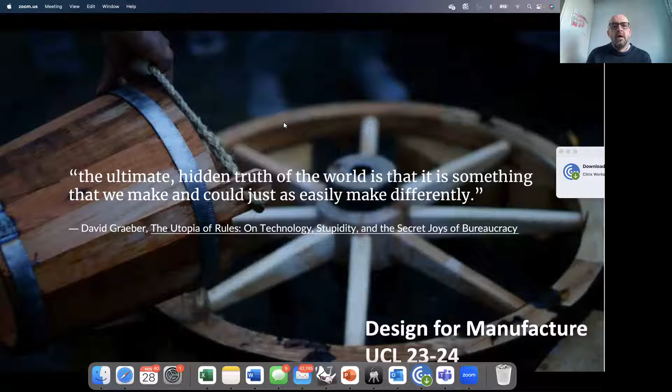So my own research is working with the NHS in the UK to understand how we can use design and manufacturing knowledge from within design to deliver diagnostic centers to eliminate needless blindness. We're working with Moorfields Eye Hospital, and we're also inspired by the Aravind Eye Center in India and how they've used system knowledge to develop eye care for people that can't afford it. So this is to eliminate needless blindness.

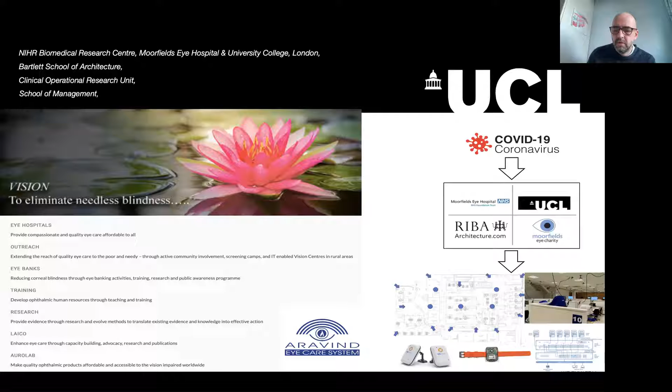So this is one very specific area where we're using manufacturing knowledge to implement design in order to make change in the world. And as I mentioned before, we're also working with Airbus, where my research is looking at how we can help Airbus achieve their manufacturing goals within the design realm.

But our course, the background of our course, can really be captured by these two very, very old books. They were published in the late 18th century by an academic and economist called Adam Smith. Now, the book on the right, The Wealth of Nations, is very famous. It's often cited as the blueprint for modern day capitalism, and it really talks about how modern day economics is balanced by the behavior of the markets, so how expensive or cheap something is, all balanced by the behavior of global markets.

But this book is often understood in isolation of what Adam Smith preferred, his other book called The Theory of Moral Sentiments. And this talks about the idea of capitalist markets, if they are unchecked by moral sentiment, or to put it more simply, if they are unchecked by the idea of what is good, then they can do an awful lot of damage to society.

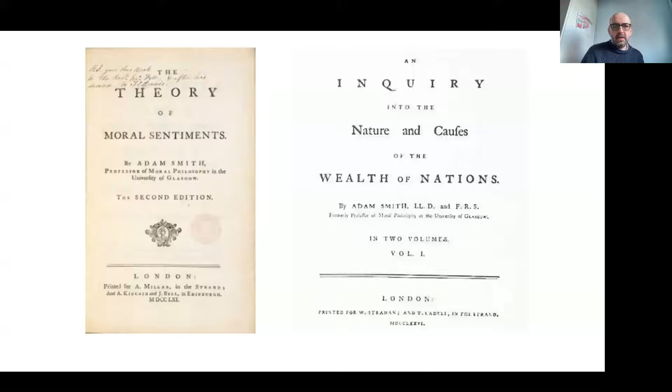As a discipline, design for manufacture is really about understanding how the behaviors of materials and processes can create value, and that value can be anything. We can look at using aluminium and machine tools to create products and parts for the automotive industry or for aerospace. But that same discipline can allow us to understand the use of wood, insulation, and structural design to understand how our buildings are best built.

We can also use this to understand if our manufacturing knowledge and design knowledge can actually create the sorts of jobs that give a meaningful existence. This idea of design for manufacture being ultimately profit-driven, that's a choice. We can choose design for manufacture to chase the bottom line and profits, but we can also choose for it to create a more sustainable environment, so our houses and infrastructure deliver less carbon, and the products we make create jobs that give meaningful existence, creating companies that deliver products and income and wealth generation to communities that are often excluded from the wealth that company may be producing.

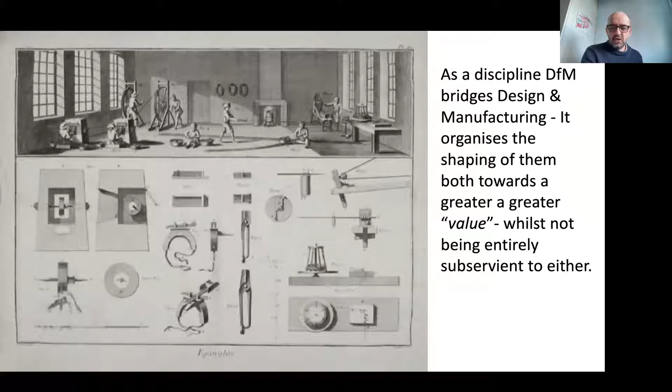So in terms of a definition, and this is a moving feast, design for manufacture is the utilization of manufacturing knowledge within design for the creation of value. That value can be anything - it can be the design of new jobs, it can be equity in society, it can be bottom line, it can be money. But ultimately, the discipline is using manufacturing knowledge within design for the creation of value, with value being anything. Here are a few examples of how value can be seen as anything.

Within post-war France, this idea of value is very different. This is a Citroën 2CV, a car developed after World War II. This car is highly efficient in terms of manufacturing - it is very lightweight, very robust, and ultimately very repairable. In France, these values were drawn out of manufacturing knowledge: how metal behaves, how it folds, how supply chains can supply the goods.

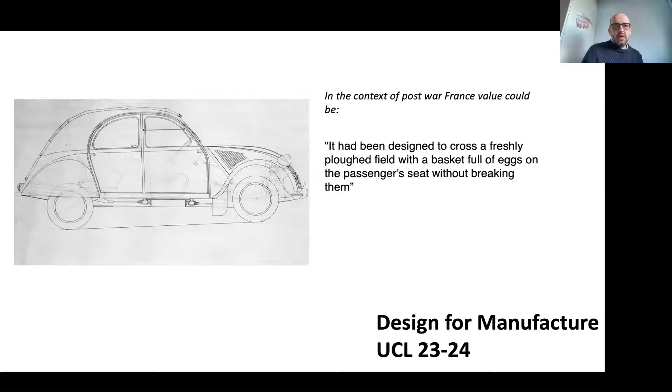Throughout the 20th and 21st century, many different aircraft have been delivered, and air travel across the world has been growing incredibly fast. This is a really good example to use about some of the miracles - and I think they are modern day miracles - of modern day manufacturing and knowledge, the amount of knowledge that is harnessed and bottled in design to be able to create this incredible product. That doesn't happen without the systemization of knowledge and using it within design.

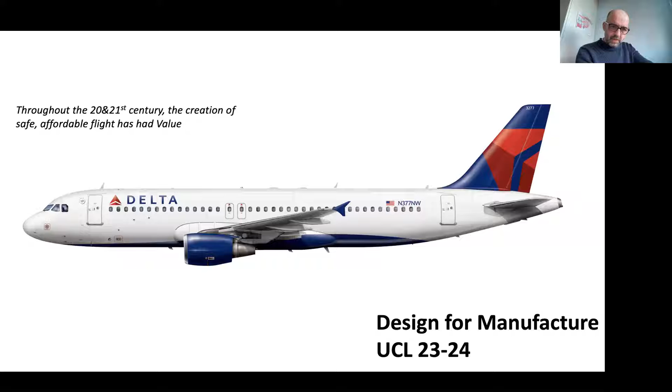Moving on from that, we can see in World War II this production line for Spitfires in England, where we started to look at manufacturing processes, and going back to Adam Smith's pin factory, we began to sequence them and began a division of labor. The value here isn't purely financial - there is a financial element, but the value here is ultimately delivering enough aircraft for national defense. You can see a series of airplanes in different extents of finish being assembled in a very highly organized sequence line.

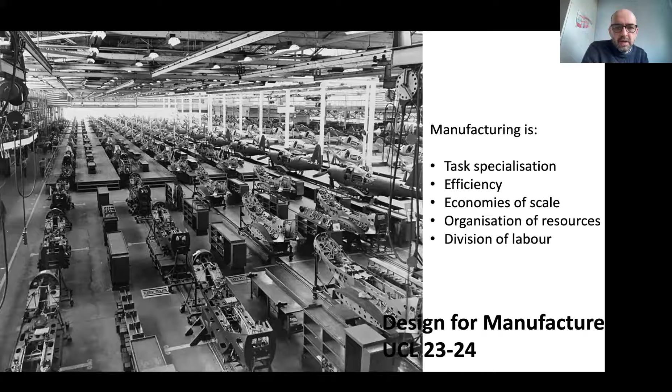Now if we have this knowledge and capability to do this, and we're able to do it for national defense, there is nothing stopping us from doing this with a different set of goals. We can systemize housing or infrastructure to deliver a lower carbon economy, deliver housing that is far more efficient, or develop the sorts of jobs and careers and income that contribute to a meaningful existence. This is something we've looked at over the years in relation to the United Nations 17 sustainability goals.

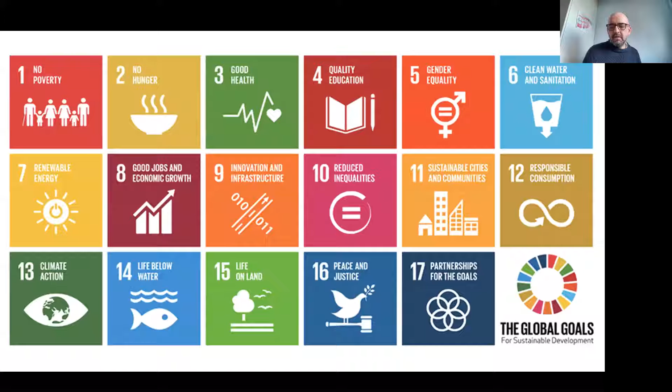The United Nations have identified these as the sorts of society that we may want to have, and we've used these within the program to give background to some of the design projects we're working on. But when it comes to the built environment, we are really challenged.

The challenges for the architectural engineering and construction sector, generally understood, are increased productivity, project digitization, vertical industrial integration, sector-wide skill shortage, simplification of supply chains, targeting on budget and on time, and reduction of CO2 footprint. These are all very good and noble, but they don't really attract the sorts of tacit knowledge and experiential education that we try to deliver in design for manufacture.

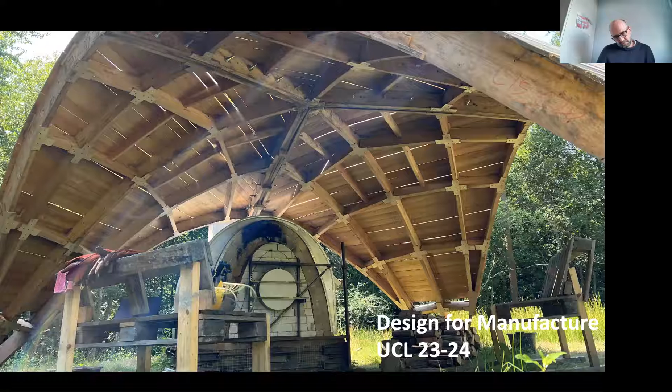It's important to remember that these students had never really worked at this scale before, in these sorts of materials, or at the one-to-one. So these students entered a workshop with very little experience, and with the help of the technical and lecturing staff within the Bartlett Manufacturing and Design Exchange and within Design for Manufacture, these students got comfortable enough with themselves and the materials in order to design a kiln - but more importantly, to understand how materials want to be shaped and how processes shape materials.

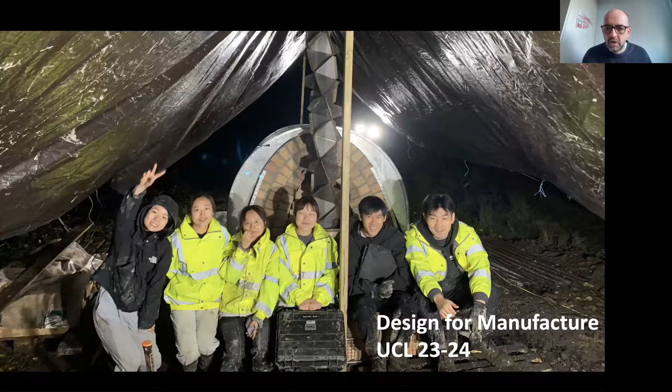With that manufacturing knowledge, they were then in a position to see what sort of design that delivers. And they went on to produce a fully operational kiln that fires at 1300 degrees and is still used today. These are some of our students from last year.

And here again, they're using ceramics. Within this year's study, we grounded the whole course within architectural ceramics. What these students have done here is deliver a facade idea that delivers cooling in a passive environment. This is an earthenware ceramic that is fired in a very specific shape.

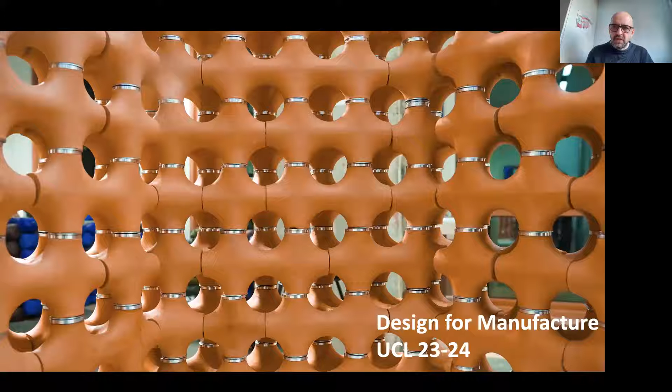Once it's fired, and once water is introduced to the inside of this matrix that we can see in front of us, the evaporative nature of this design means that it cools facades passively. So there's no energy consumption, and yet it delivers cooling. This is a fantastic project that's just been received into an international conference in Copenhagen for next year.

Now, within the same cohort, some other students were focusing on nuisance noise in urban environments. They developed a ceramic mold and component that delivered sound absorption - this is a Helmholtz resonator. The idea is that this geometry specifically would be able to absorb frequencies whilst also being part of the built environment. We could imagine this design being the front of a wall or part of a building, with the building itself having a positive effect in reducing nuisance noise.

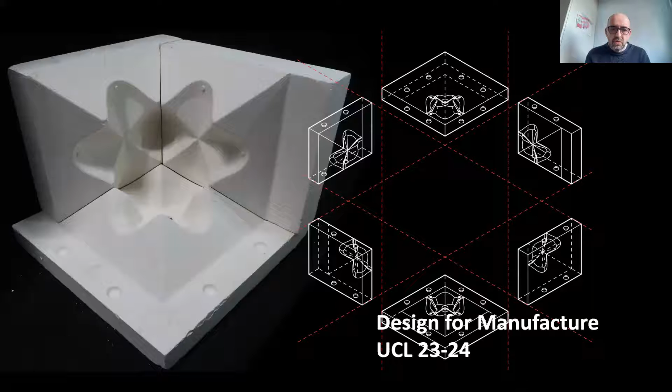I think this is a really good example of our students here. This is this year's cohort, where they themselves, with very limited prior experience from manufacturing and making, are delivering a mold—a plaster mold to be able to make a slip cast component that is then fired in a kiln and assembled into a wall structure. The students are really getting hands-on in the material and using that knowledge in materials and process within the design realm to create value.

This is a project from our current year, who are graduating in December. Our students are designing for automated assembly processes. The two students here, Balu and Juan, are using two industrial robots for the assembly of a triangulated paneled surface. Hopefully this film will play.

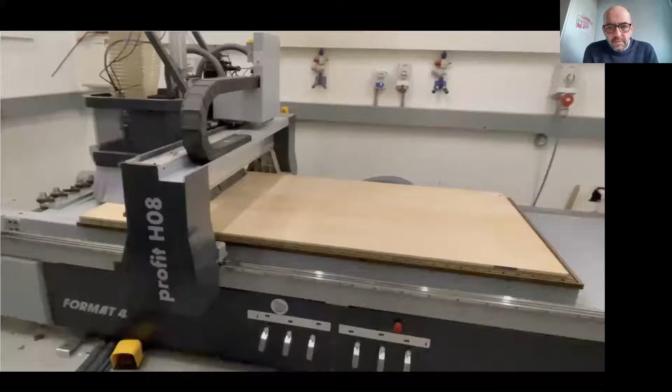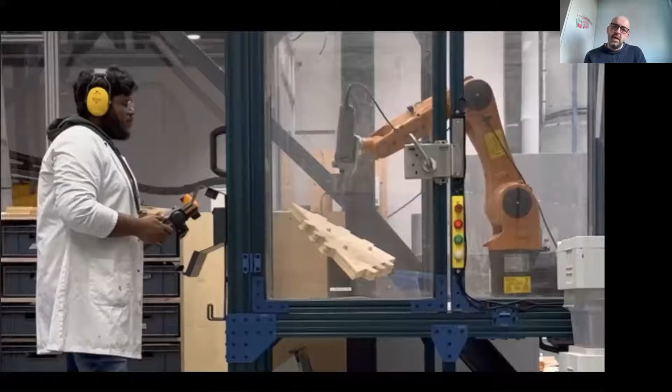Our students, in a 15-month course, have learned to be able to model their designs. Modeling their designs has needed them to understand CAD software, and it's necessary that they understand pathways to be able to manipulate these robots. With all that knowledge, they've decided that this assembly of this facade surface is their goal structure. The amount of technical knowledge needed to deliver something like this is quite extensive.

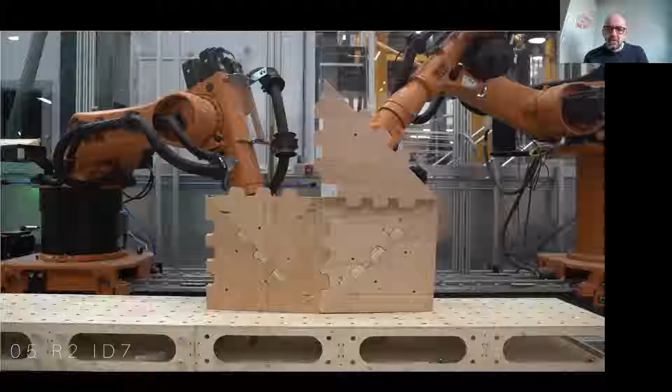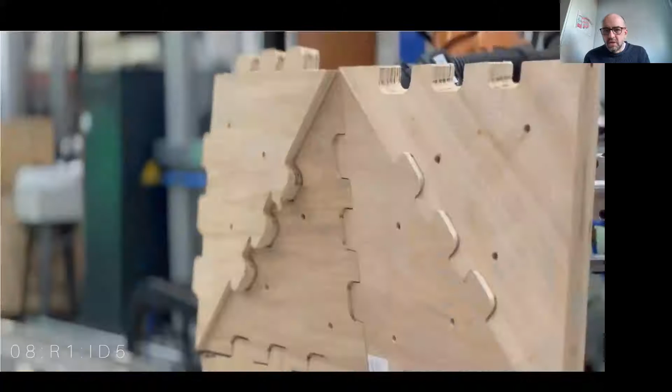One of the things they are doing is synthesizing or replicating the sorts of activities and processes that are normally done by hand, with the idea that if we can synthesize and replicate the sorts of things done by hand, could we go some way towards the development of structures and objects and design that are fully supported and enabled through automation?

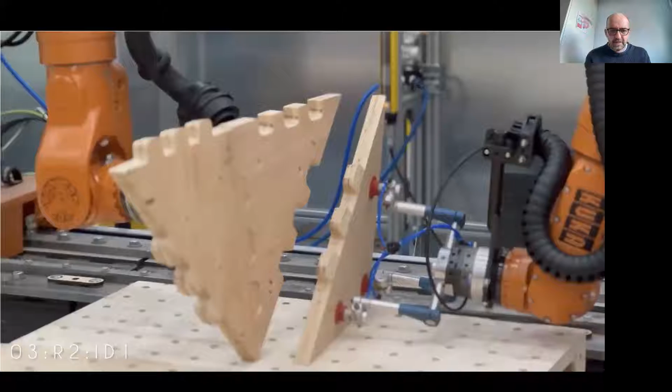And whilst that may not immediately scream, this is really important, and this is the sort of thing we need to do in our contemporary context—okay, it is a step towards understanding the role that automation may have in the built environment. I'm just going to stop that video.

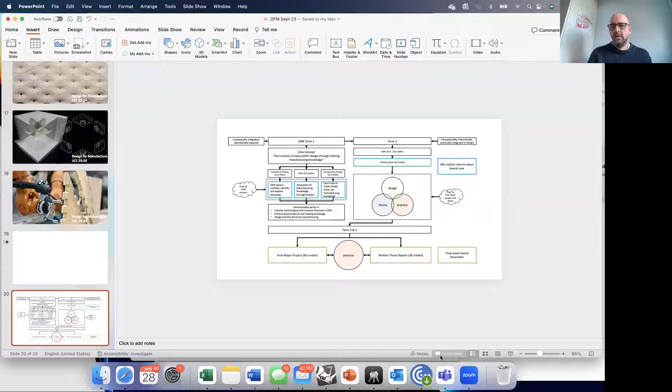I'm just going to finish on one last slide. This breaks down how our courses run. Design for Manufacture in term 1 is really trying to land all our students with the same sorts of knowledge and really explore what design for manufacture means to them. So we really push this idea of our core concept: the creation of value within design through utilizing manufacturing knowledge.

We don't do that just by repeating that mantra again and again. We do that by exploring that idea through contextual theory—the theory of what value is in different contexts. We explore different exemplars, what value may be in terms of sustainability, what value may be in social gain or social equity, and what value may be in utilizing certain materials in certain regions.

Understanding DFM value is only really doable if we understand it in the various regions and contexts that we have today. We also deliver these core concepts in a skills module, which is really the acquisition of manufacturing knowledge through practice. It's all very good for us to say, this is how you use a CNC tool, or this is how you use a machine, or this is what wood does, this is what plastic does—but if you don't experience it, this knowledge is very shallow.

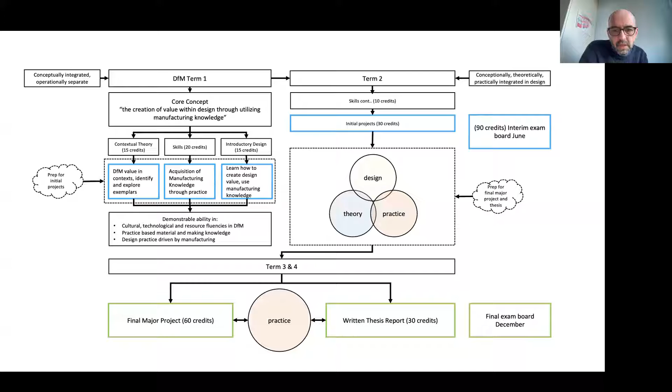Term 2 is very much about us working with you to get you to articulate those agendas. Term 2 is really a smaller version, a preparation for terms 3 and 4, because it's a 15-month program. Within terms 3 and 4, we deliver the final major projects and the written thesis report, and those two are coupled together through practice.

What I mean by that is that we couple theory and design through the act of making, because we feel very strongly that students really do need to understand the potential design impact and consequence of manufacturing knowledge. We also think students need to understand the design consequence within the manufacturing world.

So I'm going to call it a day. I'm going to stop sharing my screen, and then I'm going to look to see what questions we have, and I hope you may have some. So we have no questions at the moment. So my experience is that I've either answered all your questions, or I'm so off the mark as to not warrant any questions.

But I do invite you to ask any questions you may want to ask at the moment. Whilst I'm waiting for some ideas and thoughts to come in, I'll tell you where our students are at the moment. Our graduating cohort of 23 are working towards their final show. We have students working in something called impact printing, where they're using a robot to assemble earth and a material called cob together to get parametrically controlled earthen structures.